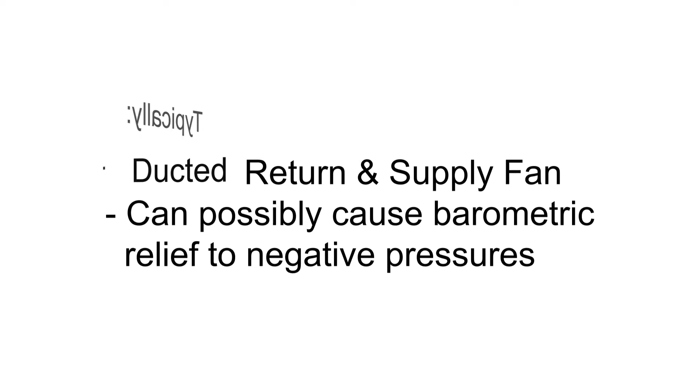In a typical rooftop installation, there are certain times when the combination of return air duct design and supply fan operation can cause a rooftop economizer unit barometric relief damper to be subject to negative pressure. As a result, this could prevent the relief dampers from opening, especially at low fresh air settings. This can cause the building to become overpressurized, which in turn can create problems that include exterior doors not completely closing.

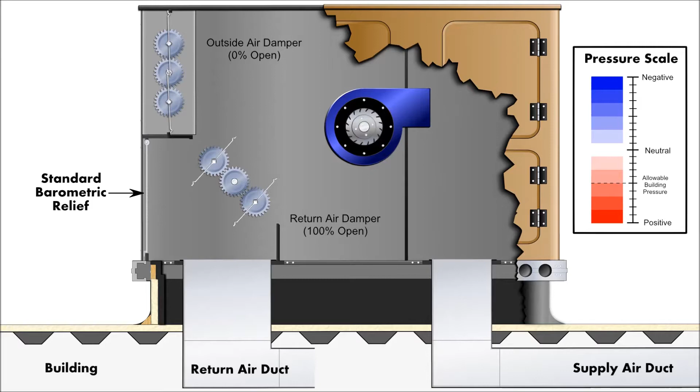To fully see this in operation, the following is a simulation of a typical rooftop with a standard economizer and integrated barometric relief dampers. As you can see, the unit starts out with the economizer outdoor air dampers fully closed and the return air damper opened 100%. Also note the standard barometric shown on the left side. In putting the unit in operation, you will see the red section being supply air or positive pressure and the blue being return air or negative pressure.

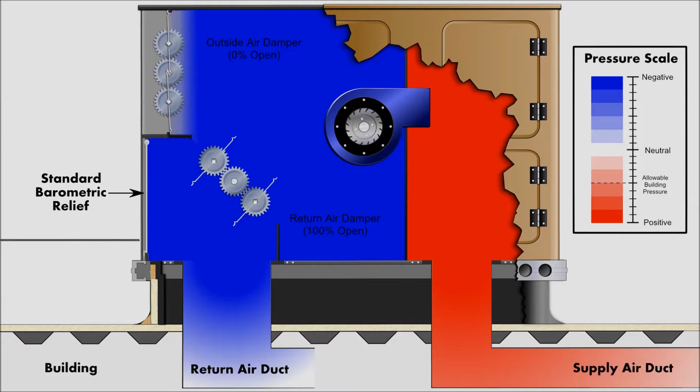At low outdoor airflows, the return air ductwork and the supply fan creates a negative pressure in the unit's relief plenum. This prevents the barometric relief damper from opening, regardless of the damper size. Today, a common solution to overcome this negative pressure is the use of an additional power exhaust device. Although power exhausts are suitable in many applications, power exhausts in general are an additional cost in both equipment and possible wire sizing. Plus, they can generate noise and waste energy.

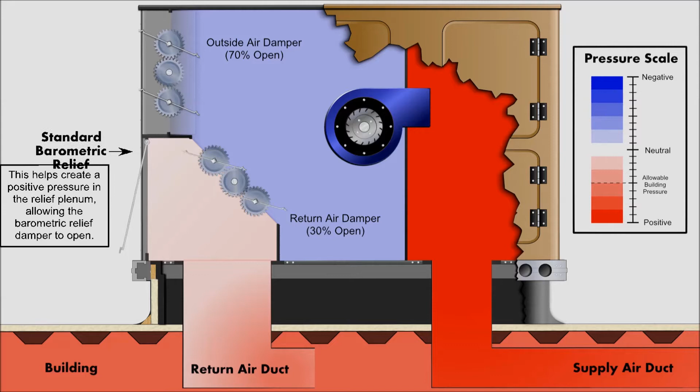As the economizer outdoor air damper opens and the return air damper closes, as shown here, you can see the building can become overpressurized at relatively low outdoor airflows since the relief damper has not opened yet. But as the economizer outside air damper continues to open and the return air damper continues to close, the return air duct is now sufficiently isolated from the effects of the supply fan and the pressure in the return air duct has become more positive. These changes create a positive pressure in the relief plenum, which allows the barometric relief damper to open. Again, depending on the application, barometric relief may not occur at low outdoor airflow settings.

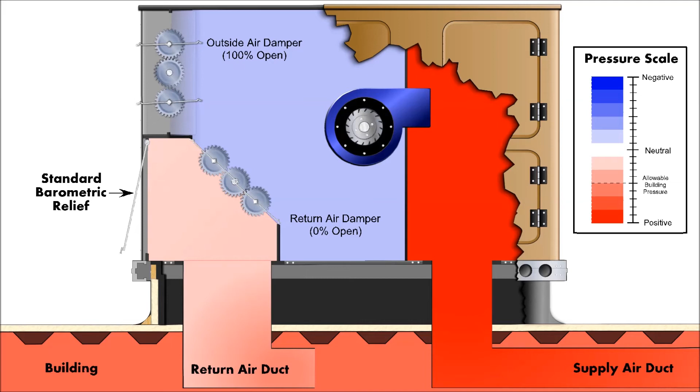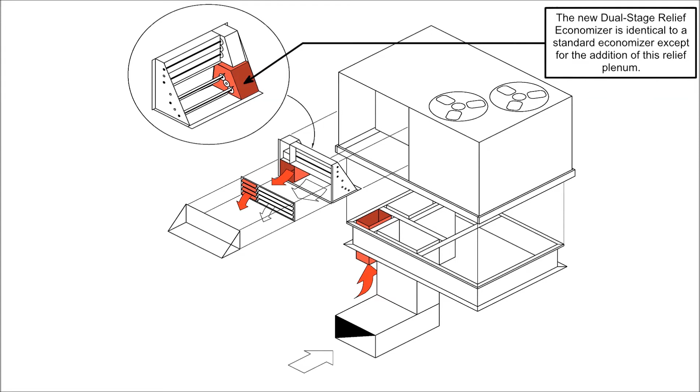To remedy this potential situation, Carrier's new dual-stage relief economizer is designed to relieve air at all economizer outdoor airflow settings without the use of power exhausters that in general are an additional cost plus can generate noise and waste energy. This new dual-stage relief economizer is a simple yet cost-effective solution to manage relief air in a commercial rooftop unit using an economizer. The key to this new design is that one relief path or duct is completely isolated from the effects of the supply fan and return ductwork, therefore allowing relief airflow at all economizer outdoor air damper settings.

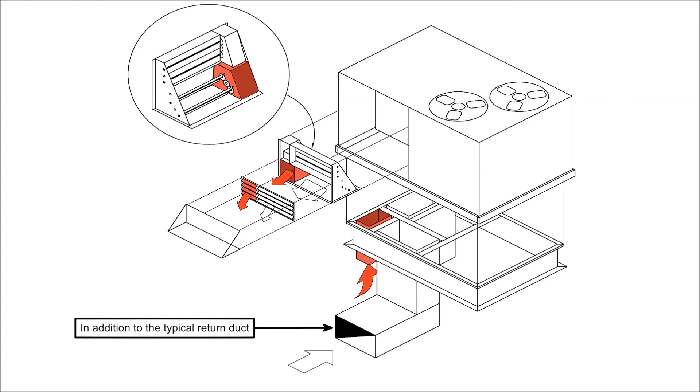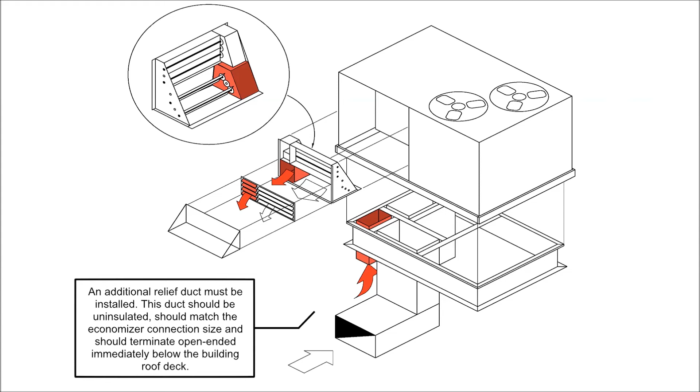In addition to the dual-stage relief economizer itself, a field fabricated and installed duct relief must be installed as shown here. This duct should be uninsulated, should match the economizer connection size, and should terminate open-ended immediately below the building roof deck. To fully see this in action, the following simulation shows how the new dual-stage relief economizer works to help relieve building pressure caused by outdoor air being brought in by an economizer.

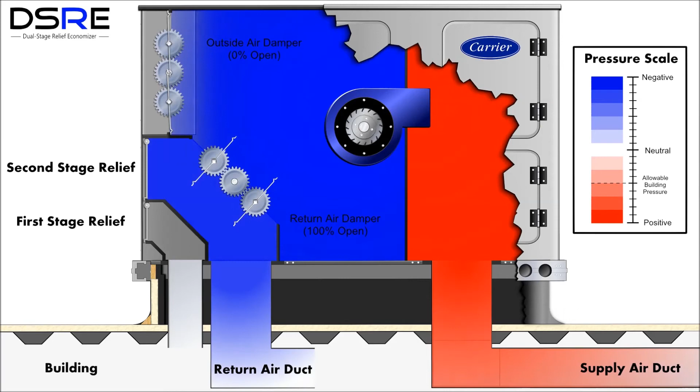The first thing you will notice is the first and second stage relief dampers shown on the left-hand side. If the second stage relief damper is unable to open due to negative pressure effects created by the supply fan and the return air ductwork, the first stage relief will open since it is not affected by these system components. As a result of the first stage relief, the economizer acts to immediately control building pressure without the use of a power exhaust. Now, unlike the unit without the dual stage relief, no matter the position of the outside air or return air dampers, the first stage relief damper allows continuous building pressure relief when needed. The second stage relief damper provides further relief at higher outdoor airflows. A simple solution for a complicated situation.

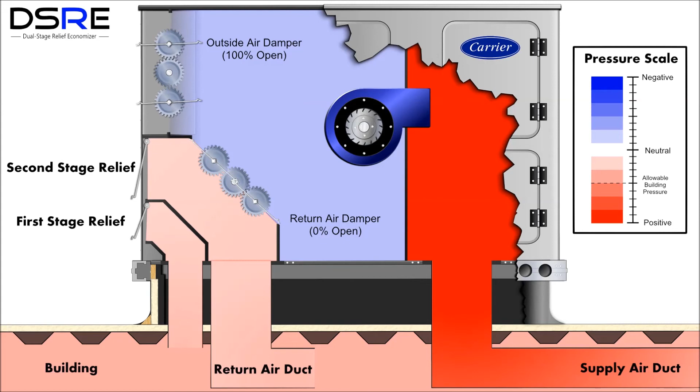As you have just seen, Carrier's new dual-stage relief economizer solves many problems that can exist when using air economizers with integrated barometric dampers in a packaged rooftop unit. This patented and exclusive offering can eliminate the need for power exhaust systems in the rooftop, which will save install costs and energy. More importantly, it will help ensure that building pressures are kept as intended.